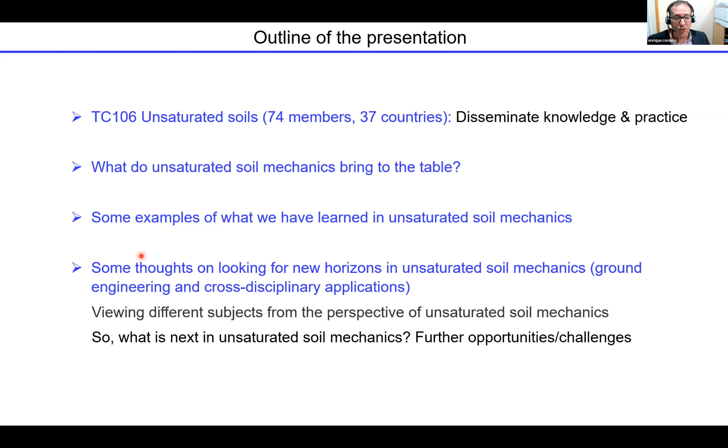So as an overview, one of the first objectives dealing with the dissemination of knowledge and practice encourages us to prepare keynote and honor lectures, state-of-the-art reports and lectures, and also organize regional conferences and main conferences regarding our TC. And in this regard, next month we are having, on Milos Island in Greece, our main conference 2023. It is the 8th international conference, with the aim to provide researchers and practitioners this opportunity of sharing up-to-date knowledge.

So there are some topics of the thematic lectures which are usually more linked to more traditional unsaturated soil mechanics, and also covering new aspects of unsaturated soil mechanics. And we will have lectures on shrink, swell, and collapse behavior, how the microstructure of the soils interacts, the THM, the thermo-hydromechanical behavior of soils in a multi-physics coupled process. Also thermal cycles, how they impact unsaturated soil behavior. Also seismic compression in unsaturated soils, new challenges in experimental unsaturated soil mechanics, and new aspects on root-soil physical interaction, which are new applications on this type of bio-inspired issues in which unsaturated soils play a major role.

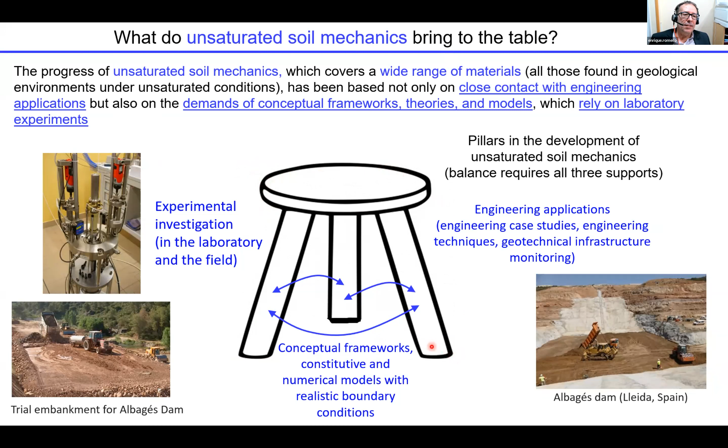So now let's start presenting some issues. I will start with more conventional issues. Then the presentation of Maha will go further with different applications. I am explaining a case which occurred some time ago on compacted earth fills used in the abutments of a highway bridge, where the material was compacted in an arid climate. So it was compacted dry of optimum. These are the mean field values compared to the optimum, and as you can see, we target a very nice dry density, but with a deficit of water.

What happens after heavy rainfalls occurring just after the summer period in which most of them were constructed? We had a lot of problems with collapse. This is an 8 to 10 meter earth fill, and this is an important collapse. You can see it by the shade. About 1 meter? Yes, half a meter or something like this. So it was impressive, and it occurred in most of the fills compacted in these highway bridge abutments.

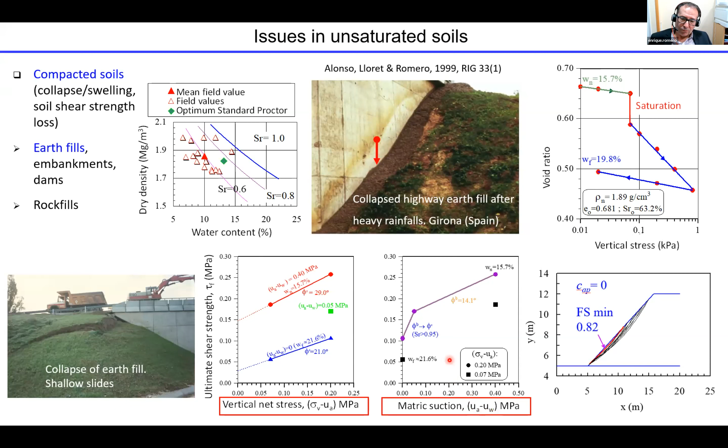Here we are having a natural soil, and we are undergoing an unloading because we want to do an excavation on a saturated, let's say, clay stone, quite stable. And during the excavation, we induce the unloading process, which occurs usually very fast. We induce some pore pressure decrease, and probably in some points we are generating suction.

Suction generated under nearly or close to saturated conditions. We can have suction even under saturated conditions, and this is something we have to have in mind, because usually suction is much related to the concept of partial saturation, and this is not exactly the case we are facing in this example. The material is still saturated, but it has a deficit in the pore water pressure, inducing the matric suction.

It's similar to what happens when we are retrieving samples at a certain depth, and the total stress relief induces a pore pressure decrease, invading the negative regime, or having matric suction, okay?

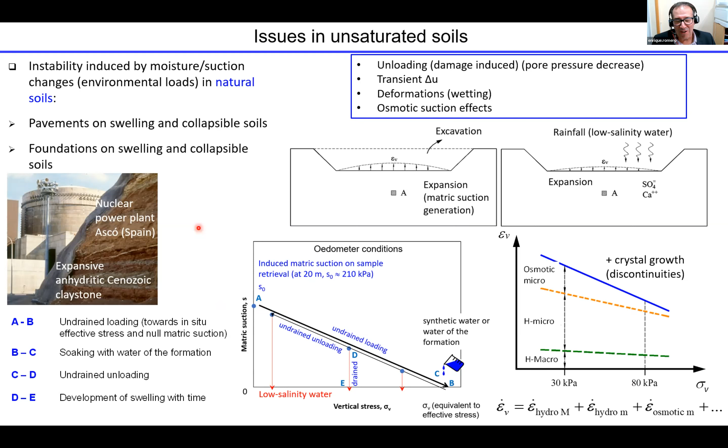This is so informative. Yes.

Manipulating water pressures in a negative regime is not so easy, so we need special techniques to regulate and control the negative range of pore pressure, converting this range below atmospheric pressure into a positive range. This is usually done by the axis translation technique, making the liquid pore pressure positive and allowing its manipulation.

So we are increasing the air pressure, an artificial increase. It's like moving the soil to another planet where the atmosphere is heavier. Then we have a difference between the pore pressure, the liquid pore pressure, and the gas pressure, which deals with suction.

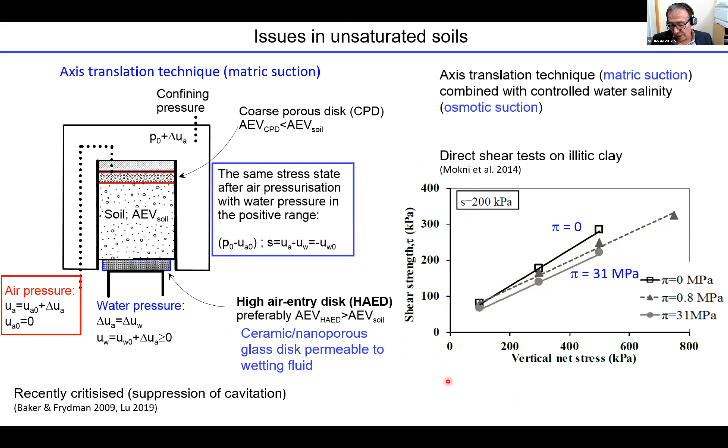By controlling the suction, we can also apply different levels of osmotic suction. We can have more salinity or more dilute conditions, which affects the shear strength properties in this case. So this is the way we usually address these issues.

Now let's go into this very complicated slide, but we will go step by step. The first thing to address is the graph showing mean particle size, ranging from very small, silty, clayey materials, to more sandy materials, to larger coarse granular aggregates.

Here we are having the volumetric strain, shown in a log scale just to represent the data. The data represents the collapse occurring when we start from very dry conditions to saturated conditions. Depending on the size, different phenomena may arise, and this is very important for the theory to explain different issues.

For example, in a silty clay soil, water is usually stored inside and outside aggregates, but the aggregates are porous elements capable of storing water. During water soaking, the aggregates expand and lose stiffness. Under a certain load, they accommodate and fuse together, reducing these large pores, and this is how collapse occurs in silty clay soils.

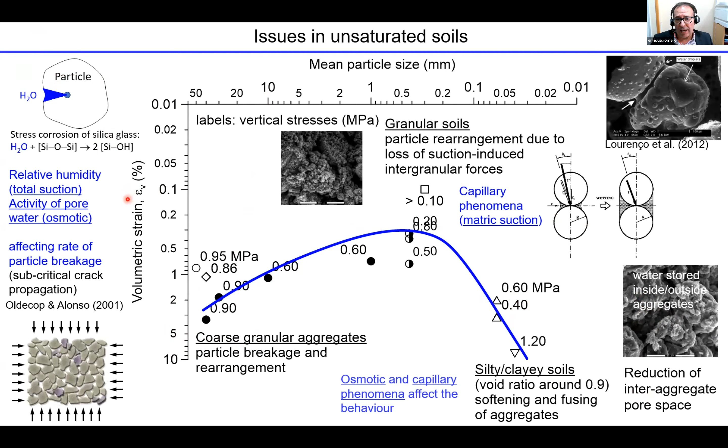So what do these field cases have in common, and what does unsaturated soil mechanics bring to the table? Basically, we have matric suction, dealing with the curvature of the meniscus, where we have an air pressure in excess over the liquid pressure, and this is why we have this meniscus, usually in between grains.

But don't forget about the osmotic component, which also plays an important role. When dealing with chemical issues, the concentration needs to be activated as a pressure-controlled variable, and this is not easy. So we use thermodynamics to convert the concentrations or activity into a pressure—this is the osmotic pressure, which is important to have the gradients and the total head for the gradients controlling flow to occur.

Flow occurs due to total suction gradients involving osmotic, matric, and other more complex components. The mechanical behavior is driven by changes in matric suction, affecting interparticle forces, particle breakage, and the shrinkage or swelling of clay aggregates.

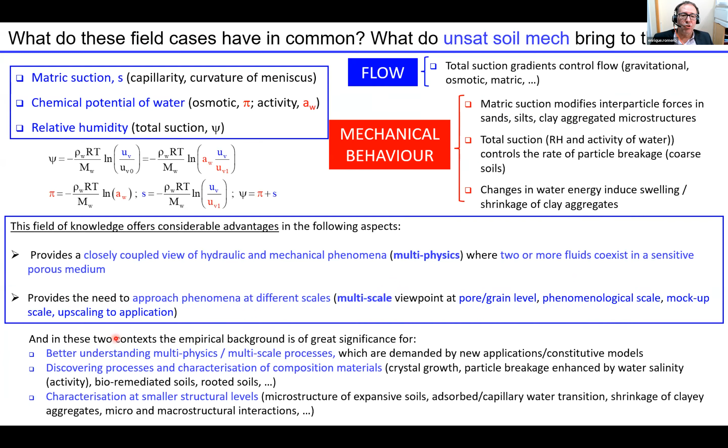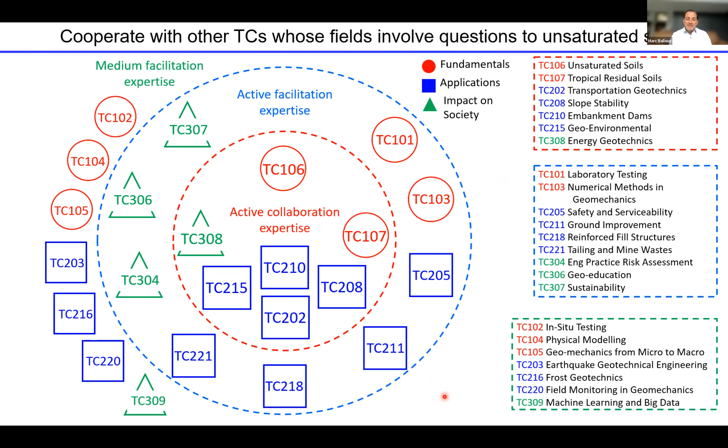You know, water is our number one enemy. Yes, water is an enemy, particularly if the water is contaminated. And also all the water is heated - this is another problem, with energy geotechnics. The only TC that likes water to come through is the geothermal, geoenergy one. Yes, but it also has important issues to face in the multiphysics, because temperature changes and processes dealing with heat exchange change properties.

Looking a little into new horizons dealing with unsaturated soil mechanics, I think we should always target the future in order to revitalize the relevance and impact of unsaturated soil mechanics, and also shift to other cross-disciplinary research applications, and have more collaborations with the technical committees previously indicated. These are a list of possible future applications in which we are involved.

We are there in ground engineering because we are very close to climate stresses and soil-atmosphere interactions. We are very close to rock weathering, shrinkage and cracking, fissuring. We are close to chemical issues with crystal growth and salt accumulation, which is a critical issue in arid climate soils, where the solvent water evaporates but the salt is always there, increasing and growing, and probably affecting the expansion capabilities of the systems.

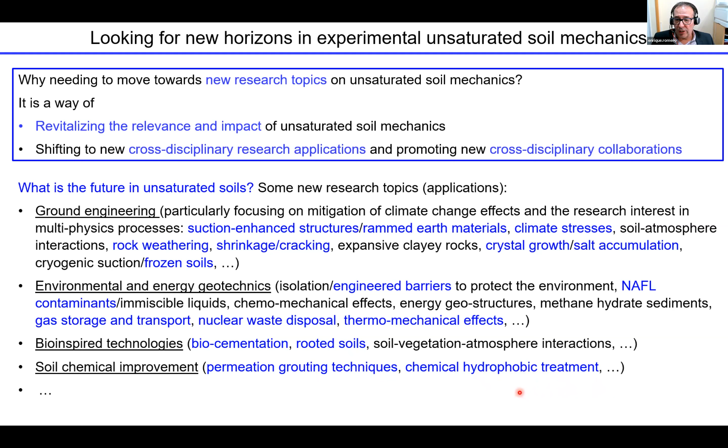Also in bioinspired technologies, because we have partially saturated soils in rooted soils, and also biocementation phenomena, because we need the possibility of gases to come through, or to have partially saturated conditions in rooted soil. And also in other fields like permeation grouting techniques under partial saturation, or hydrophobic treatments, which can be used to avoid the impact of water damaging certain materials.

And this is a look of how we usually try to look at the phenomena. This is in the case of bioinspired technologies, rooted soils. Here we have not only the sensitive porous medium, but also sensitive roots, which are also shrinking and swelling, decaying and living, okay? So they interact with the soil, affecting slope stability and soil-vegetation-atmosphere interactions. And we need to look at these systems in which roots affect soil and soil affects roots in all these phenomena indicated in this part of the slide.

But we need to face all this knowledge by looking at the phenomena at different scales, and this will help us upscale the problems to approach, let's say, real applications. Okay, so here we are facing microstructural issues, how fissures are created besides pores when roots grow inside the porous media. We are not only clogging pores, but also having new interfaces between the soil matrix and the roots. This affects the transport properties of the soil and the water retention curves, which can be observed in a phenomenological

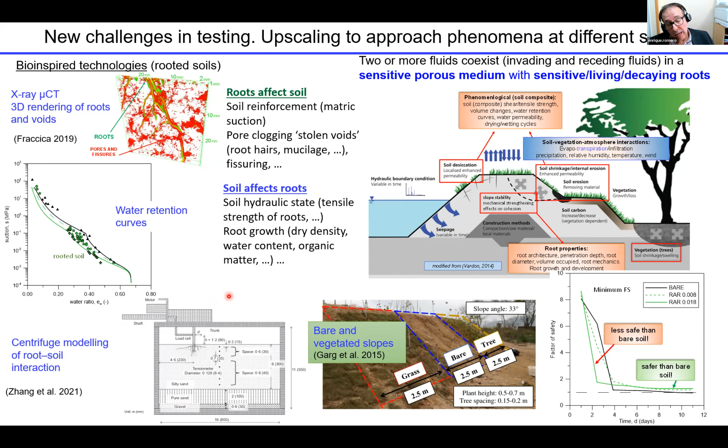So this is why we are only... You should add agriculture engineering to your slides. Yes, yes, this is the reality. This is the reality. Yeah.

And this is another case, a little bit on another topic, in which we have exactly the same upscaling phenomena. Basically, the intention here is to have an engineered gas permeable seal. So we need a seal. This is for isolation barriers to protect the environment, usually for low and mid-high radioactive waste disposal.

And here there are two ways of getting rid of the gas, which is produced by the corrosion of the metallic canister. Usually by allowing it to slowly diffuse through the pore water. But this is sometimes dangerous because we can generate high gas pressures, and this is not good because we can open fissures to the biosphere and contaminate the biosphere.

The other way is letting the gas pass through more permeable seals, which have low water permeability and high retention capacity, but they are gas permeable, okay? This is usually done with sand bentonite mixtures. And we looked into the effective gas permeability transport properties at different scales.

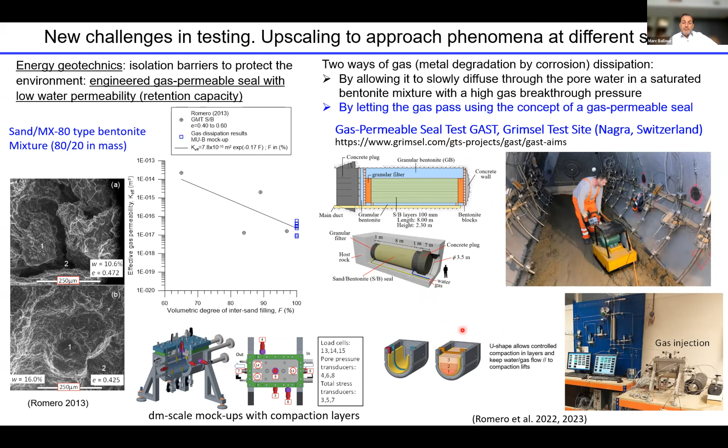Enrique, we're running out of time. Yes, maybe... yes. I think this is the last. This is my last, and I will close my presentation.

So these are a list of future challenges that I am thinking of as TC activities. We need further achievements in academic concepts, looking at these multidisciplinary and multi-scale problems. But also we have to improve laboratory techniques to improve the efficiency and representativeness required in modern engineering practice. This is more with more conventional types of practice.

Also, we need to progressively incorporate these techniques in design criteria and codes of practice, which is something still missing, because partial saturation is very far from a lot of codes. And also we need to share information. This is particularly important when we are talking with the industry, with the practitioners, to reduce the gap from fundamental experimental research, so that we are a fundamental TC to apply research and progressively bring unsaturated soil mechanics into practice. And of course, important. Yes, I agree. This is why I underline these things, because I think this is very, very important.

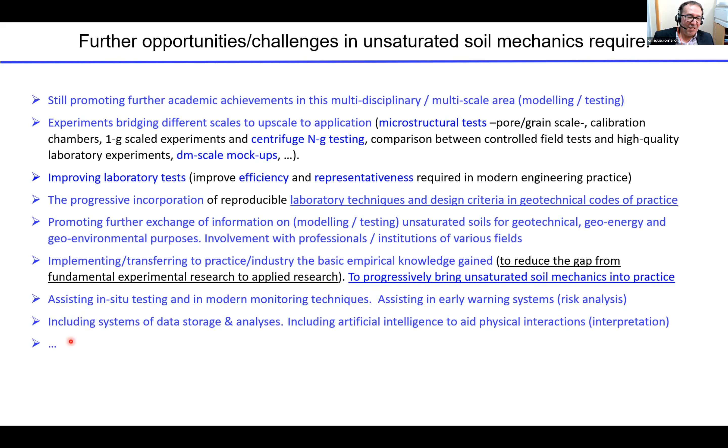And of course there are other things, like assisting in situ testing and modern monitoring techniques. I had the opportunity some time ago to go to the Grimsel test site of Nagra, Switzerland, where some of the tests dealing with radioactive waste disposal are carried out. This is a high temperature test. It's called HotBENT. You can look at this information here. And it has 1,300 sensors.

You can imagine. I took the opportunity. These are my pictures. These are cables for the sensors. This is impressive. And all this is coming to computers to look at all this information. This is why I also place assisting in situ testing and modern monitoring techniques, how we face all this important data. Okay, thanks for your attention.

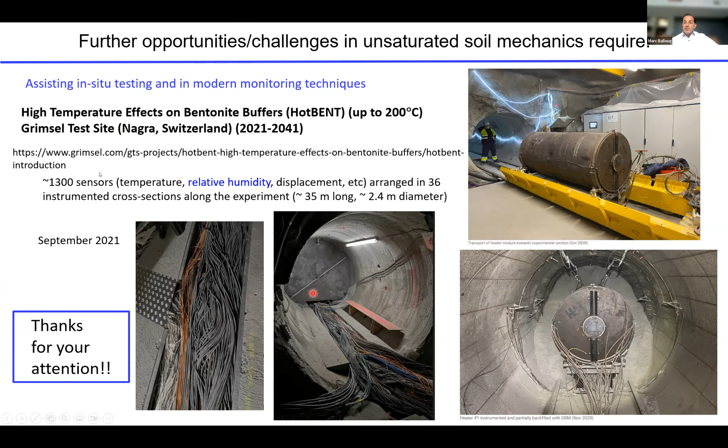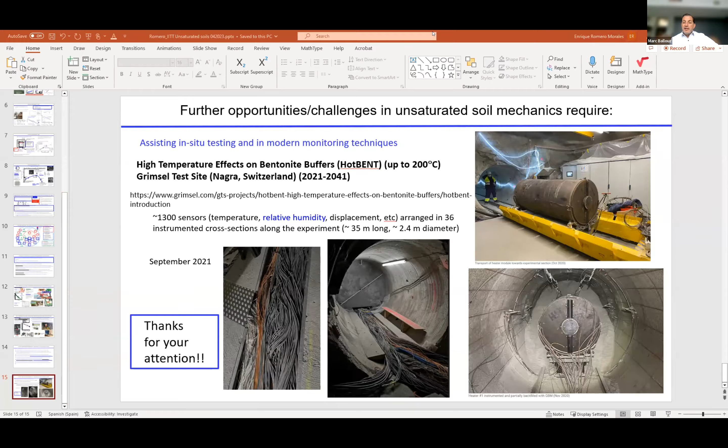That's all. Thank you so much. If you stop sharing, it will be my turn. Yes, I stop sharing. There's so much to learn in this field. It's Easter and it's God's day, and you see how small we are compared to what He created. We are still very small. Yeah. Now you can share your screen. You're still muted. So hopefully by now you can see my screen. Yes, I like how you modified the logo. Yes.

Okay. Thank you, Professor Enrique. It was a very interesting presentation.

And it shows us how complex unsaturated soil mechanics can be. Hopefully, with what I will be presenting today, I would try to encourage you to use unsaturated soil mechanics for routine geotechnical applications.

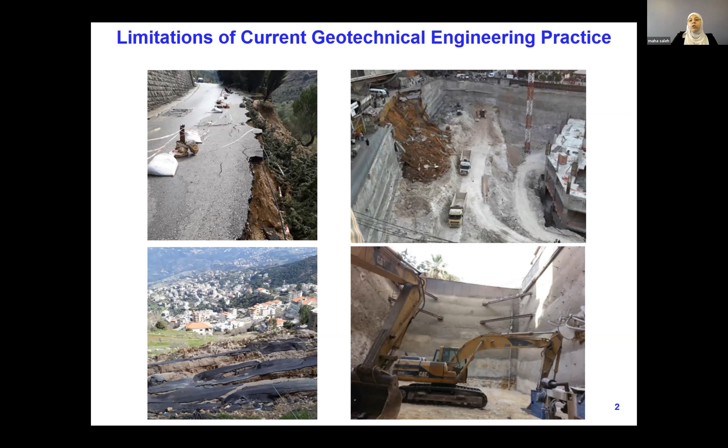These limitations are reflected in failures that continue to be encountered in natural slopes, overestimation of wall deformations in the design of shoring systems, the relatively high bearing capacities that we measure in the field as compared to what we calculate using the conventional methods, and the list goes on. The big question here comes to mind. Why do failures happen? And why do we continue to observe discrepancies between predicted and observed performance of structures?

While there are many reasons that can be attributed to these observances, one which is most important to me is ignoring matric suction and its contribution to the soil strength in our design approaches. All conventional design approaches now assume that the soil is in a saturated condition, but in fact, it isn't.

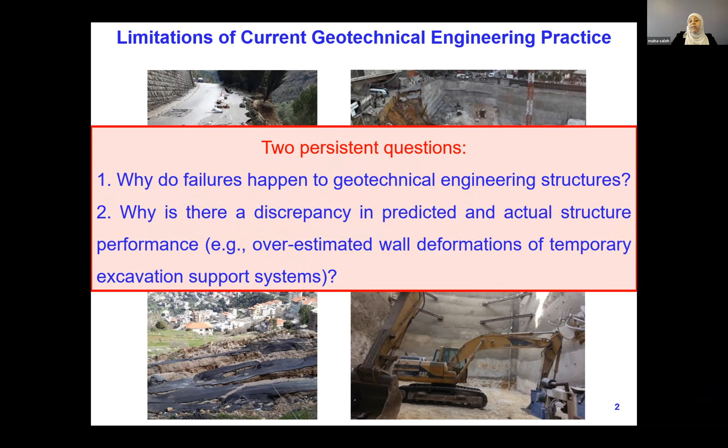Geotechnical infrastructures such as footings, shallow foundations, piles, pavements, and retaining walls are typically located above the natural groundwater table, where the soil is in a state of unsaturated conditions. This is particularly true in semi-arid regions and arid regions that constitute approximately 40% of the world, where it is likely that these infrastructures would never attain fully saturated conditions in their design life.

So let's take a look at the pore water pressure profile under these structures in these regions. We can see that multiple suction profiles can occur in the unsaturated zone above the water table under different climatic conditions as well as different environmental conditions, such as some of the examples that Professor Enrique provided and how vegetation can affect suction.

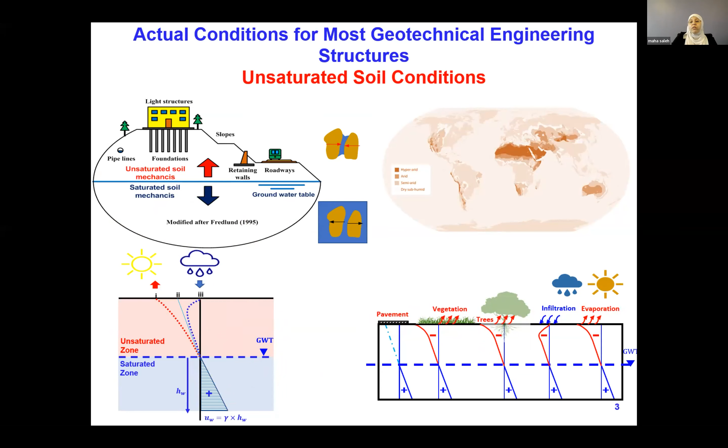This means that the performance of the soil in the unsaturated zone is not constant, but it varies temporally with suction. This variation in suction needs to be considered in the design because we know that there is a great difference between the behavior of saturated and unsaturated soils. And this differentiation needs to be confirmed and taken into account by practitioners.

But why is unsaturated soil mechanics still rejected by the practicing community? Mainly because engineers are not trained to handle unsaturated soil conditions, specifically during their undergraduate years. In addition, there's a hesitance in relying on suction, which is variable over time as we've established here. Also there are complexities in measurement of the soil property functions of unsaturated soils because it involves a lot of complicated and cumbersome laboratory tests.

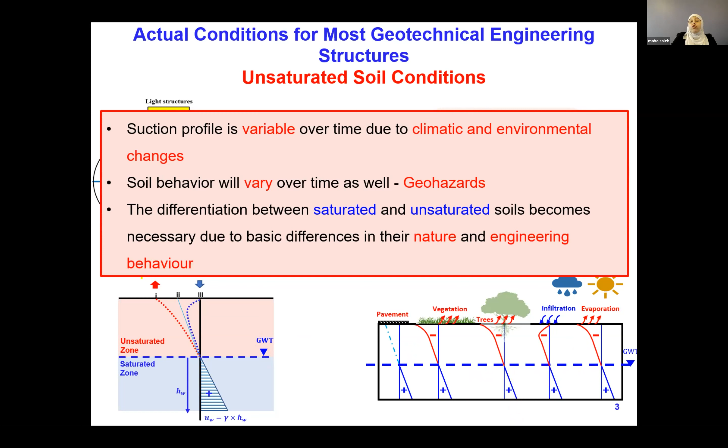But is there a way around these challenges and concerns? And what do recent research trends offer us here? Let's have a look at some field suction profiles monitored under various climatic conditions and environmental scenarios, which show that the soil doesn't necessarily reach saturation, or suction is not necessarily lost. This suggests that with proper understanding of the local climatic and environmental conditions, along with some tools for seepage analysis, a reliable suction profile can be considered in the design of geotechnical engineering structures in unsaturated soils.

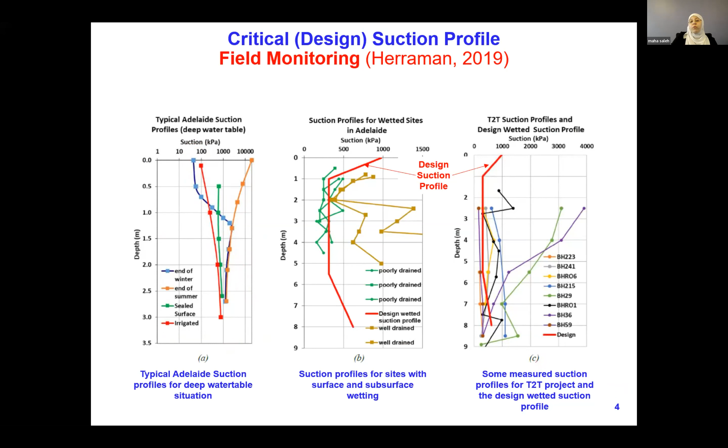Moving forward to unsaturated soil properties and how we can better estimate them. Experimental studies in the lab have shown that there is a similarity between the soil-water characteristic curve and the soil property functions of unsaturated soils. This observation has led to the emergence of simple estimation tools for predicting unsaturated soil property functions using the soil-water characteristic curve. Such simple techniques are valuable in geotechnical engineering practice.

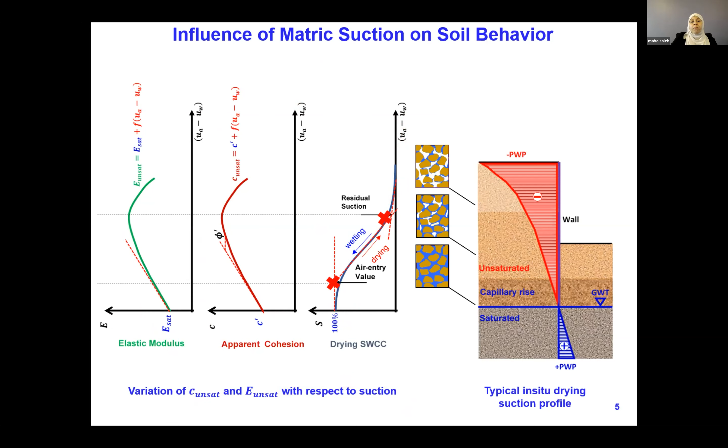For example, to overcome the complexities involved in measuring the suction contribution towards shear strength in the lab, the above models have been developed and validated, and they show reasonable agreement between the measured values in the lab and the predicted shear strength using the soil-water characteristic curve. So the use of these models, developed by Vanapalli in 1996, as well as Oh and Vanapalli for modulus of elasticity, only requires the soil-water characteristic curve in addition to a few basic physical properties of the soil, such as plasticity index and grain size.

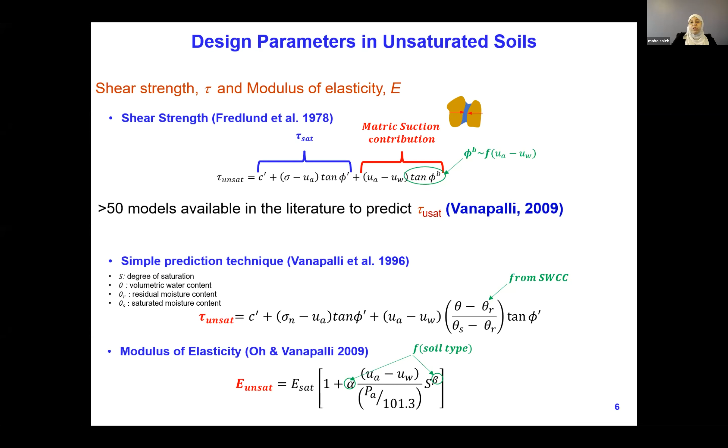The development of such models in the literature has resulted in the emergence of a framework for extending unsaturated soil mechanics to routine geotechnical engineering problems. We're going to go over this framework in this slide. The framework mainly consists of 5 basic steps.

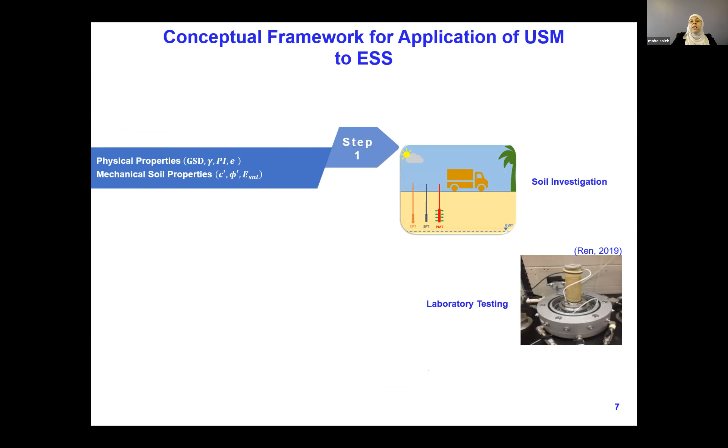The first step would be measuring the basic soil properties, similar to what we do in conventional soil mechanics, either from soil investigation or from laboratory testing. Once we have the basic soil properties, we can measure the soil-water characteristic curve in the lab or use many of the prediction models available in the literature to predict the soil-water characteristic curve using the basic physical properties.

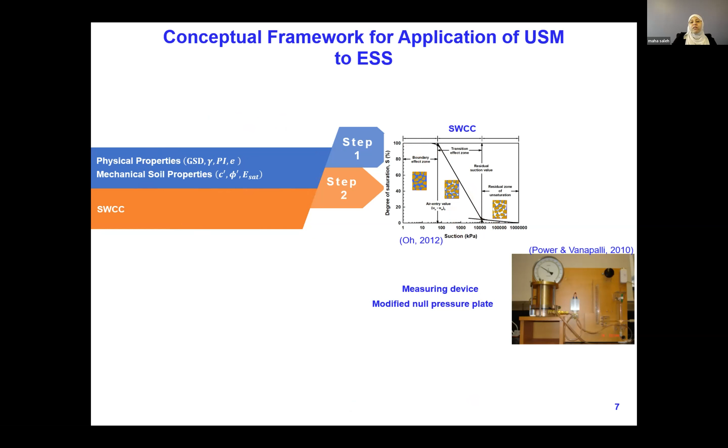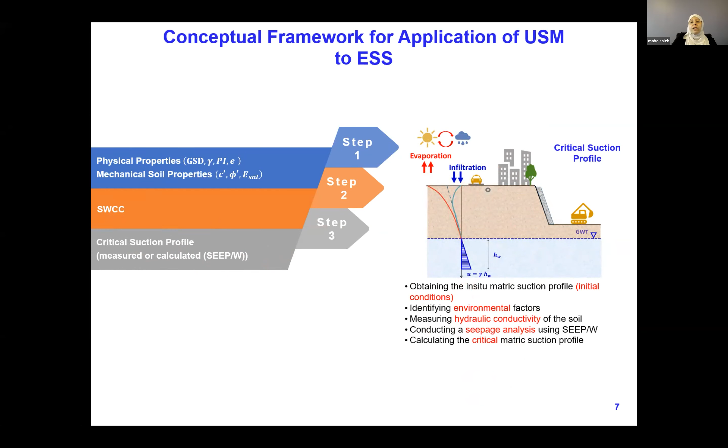Then, the critical suction profile can be determined either from historical local climatic records or by running a seepage analysis, which takes into account climatic conditions, environmental conditions, as well as the hydraulic conductivity of the soil. Now that we've obtained a critical suction profile, we can determine the unsaturated soil property functions, namely the shear strength and the modulus of elasticity of soil, from the soil-water characteristic curve corresponding to the critical suction profile that we've estimated in step 3.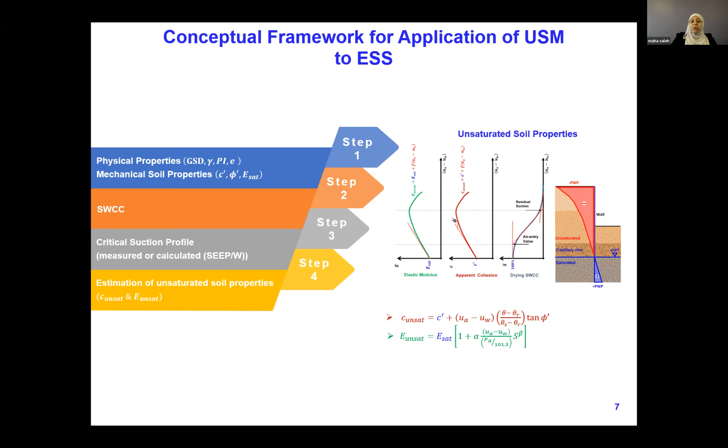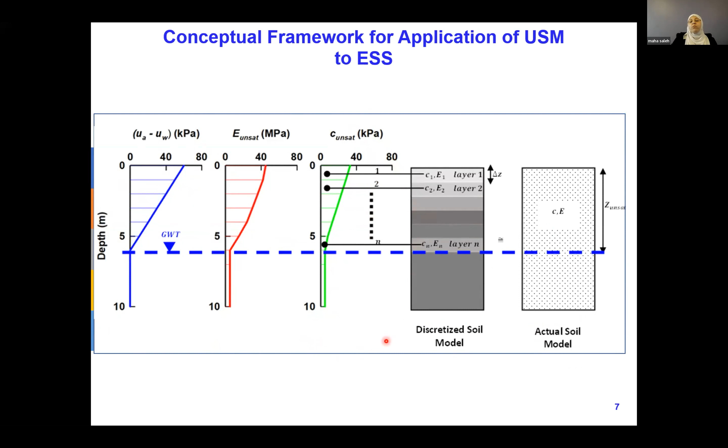And finally, step 5 involves obtaining a discretized soil model with these soil properties based on the critical suction profiles that we've estimated. Once we have these soil properties, we can proceed with analyzing the geotechnical problem at hand.

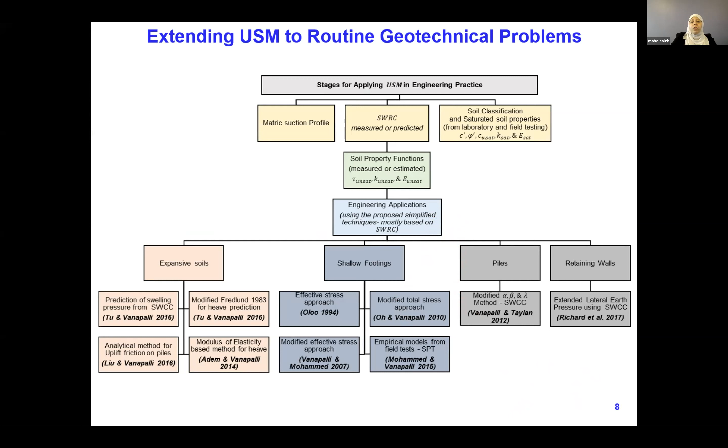Here, research at the University of Ottawa, led by Professor Vanapalli's group, has been focused on expanding unsaturated soil mechanics to routine problems with the use of simplified procedures relying on the soil-water characteristic curve. Other researchers also contributed to this field as well. We're not going to go through all the procedures. We're going to focus just on bearing capacity and pile capacity, just to demonstrate some of these models.

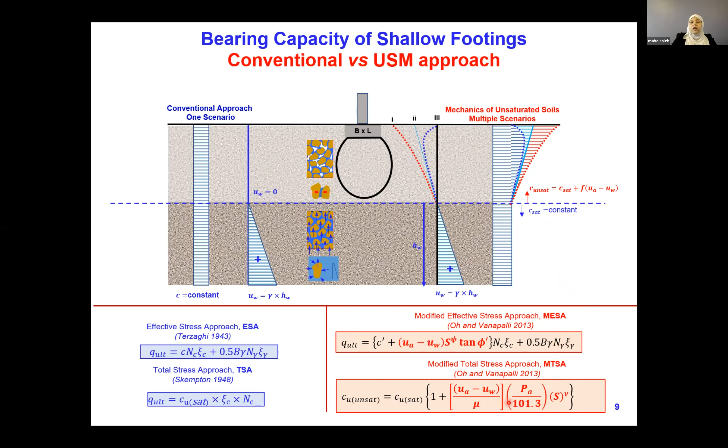So the unsaturated soil mechanics approach, unlike conventional methods, is associated with multiple suction scenarios, which would lead to multiple apparent cohesions and multiple moduli of deformation. Available simplified procedures to estimate the bearing capacity considering suction have been provided by Oh and Vanapalli, 2013, for both drained and undrained conditions. These procedures were validated experimentally on various case histories, as well as model footings tested in the Ottawa University laboratory, where the estimated bearing capacity was observed to match the measured bearing capacity.

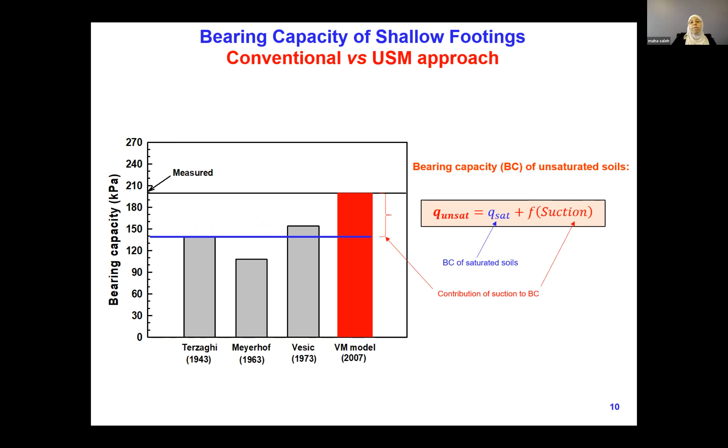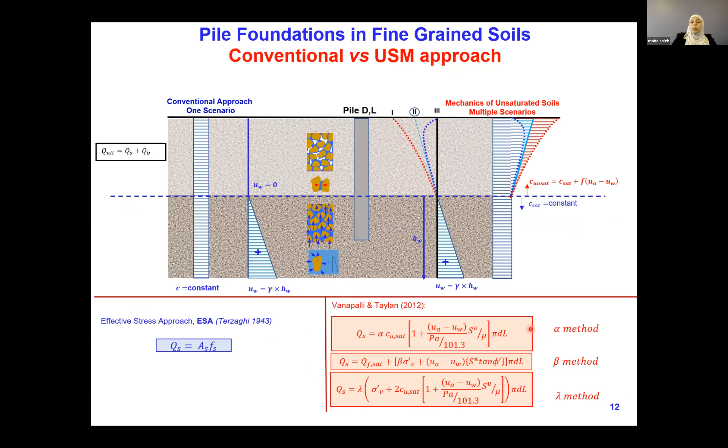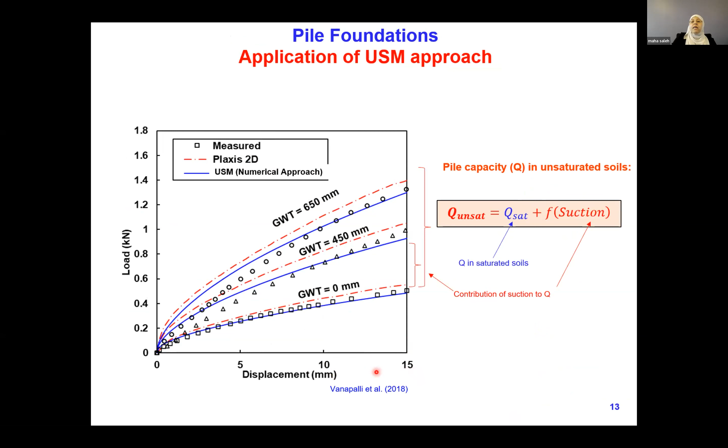Similarly, extended procedures for pile tip resistance, as well as skin friction resistance for piles, were developed using the soil-water characteristic curve as a tool. Experimental validation on model piles showed good agreement between estimated and measured pile capacities considering suction.

Another very typical application of geotechnical engineering would be excavation support systems. The focus now at the University of Ottawa has been given to excavation support systems, an area that has received little to no attention within unsaturated soil mechanics. The influence of matric suction on the lateral earth pressure was included using the soil-water characteristic curve as a tool as well, extending the Rankine active and passive earth pressure equations.

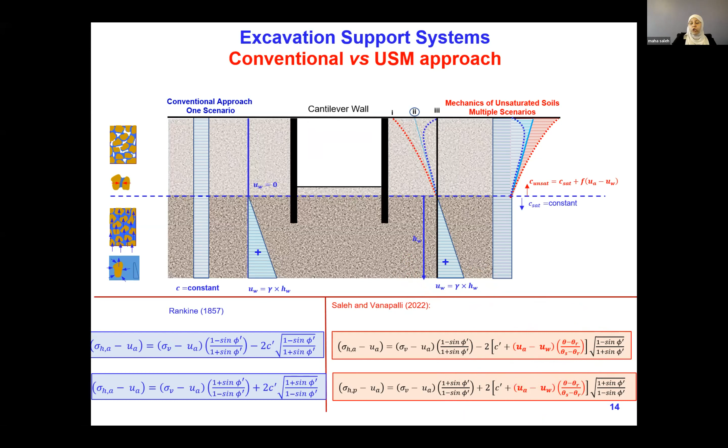In order to demonstrate this and the framework that we've discussed earlier, a finite element numerical model was used to model a cantilever diaphragm wall, considering saturated and various unsaturated conditions to investigate the performance of excavation support systems in unsaturated soils.

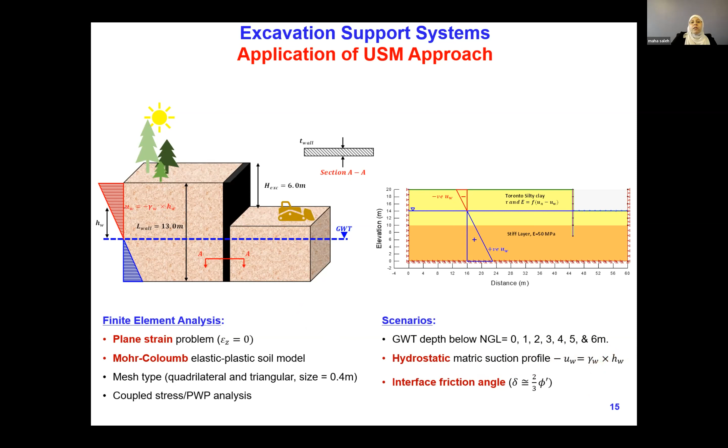Sorry to interrupt. May I know what kind of software you are using to obtain these results? Yeah, so the software that we used here is SIGMA/W. It's a commercial finite element software specialized in geotechnical applications. Okay, thank you. SIGMA/W. Yeah, it's GeoStudio, SIGMA/W, correct. The results from the previous slide? Yes, and this as well, but these were developed using the plots separately.

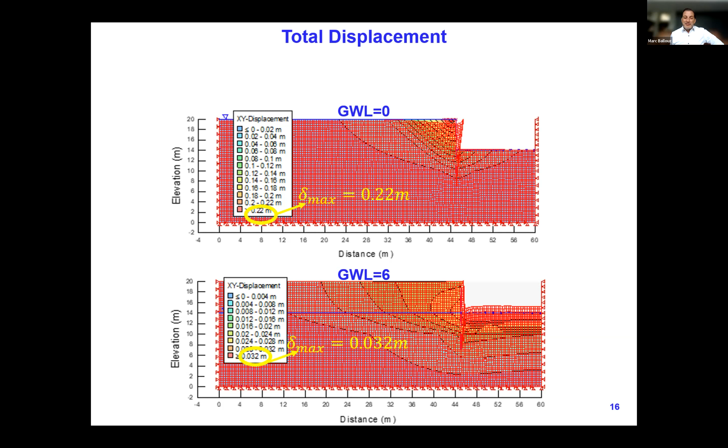Okay, I can't wait, I'm counting on you, Maha, to change the world. Well, thank you very much, Professor. Oh, your beautiful presentation, keep going. You have to go a bit faster. I'm sorry, but we're running out of time.

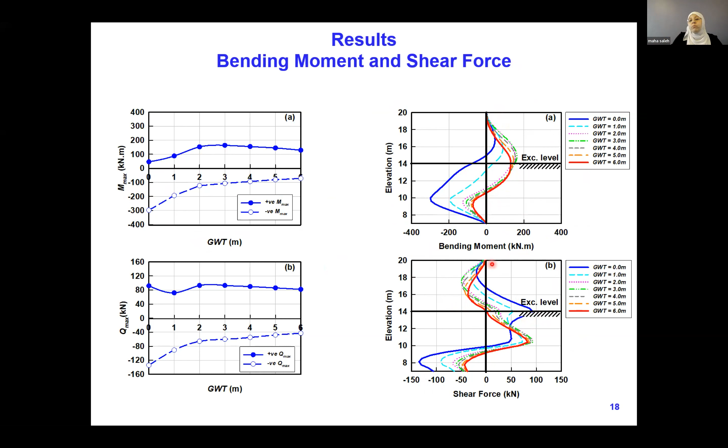Yeah, I'm almost done. So as we said, results for wall deformation, these are typical parameters that we monitor when designing excavation support systems. Similar trends were also observed for the bending moment and shear force diagram. Red is for the most unsaturated case and blue is for the most saturated case. Perhaps here it's very important to show how the maximum and positive bending moment can be unpredictable. It's not just a matter of higher or lower, it's also a matter of how the bending moment becomes distributed along the pile. This is important for engineers who use different steel sections across the pile when designing an excavation support system.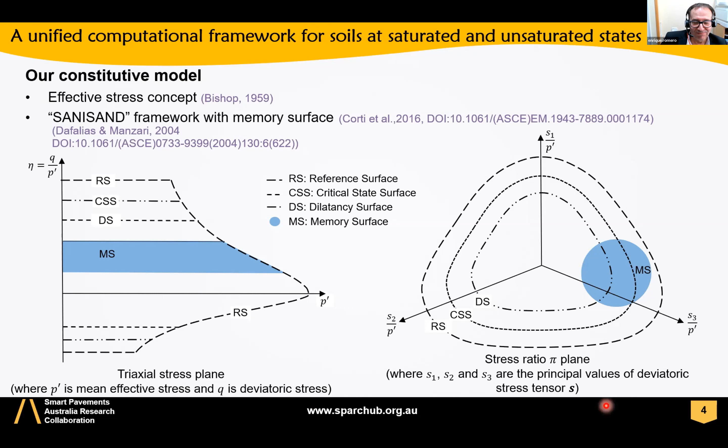So now I'm going to continue. This test proposed by the SPARC Hub is a suitable laboratory test that provides valuable insights into the behavior of soil and pavement structures. It's performed using...

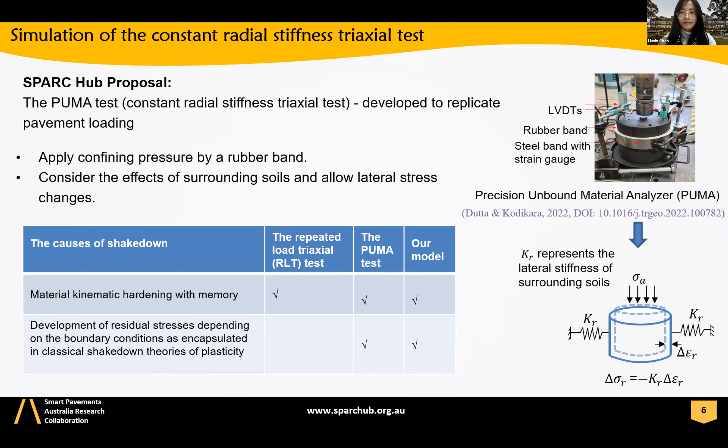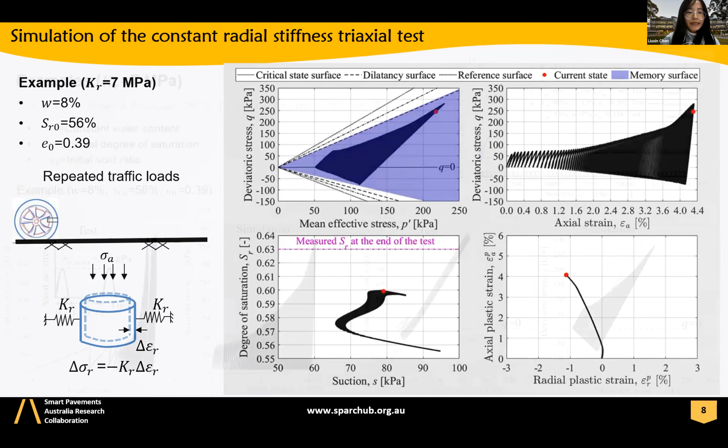So you are handling both bounding curves, the wetting and the drying. Yes. And what happens if you change the degree of saturation, or the water content, by wetting? Are there any results on these aspects during these cyclic repeated traffic loads? So in these slides, we simulated many examples with different initial conditions. But imagine that you are changing the degree of saturation by wetting. Have you run this type of test? During testing, you mean? During testing, yeah. Like it rains?

Oh, okay. Yeah, so for the initial condition, we consider it's wetted to this state, and then we start the test. Yes, but imagine that you are doing the cycling, and at a certain stage you receive some rainfall. What happens? The degree of saturation increases, but this hydraulic process also affects your hydromechanical constitutive model, which is coupled through the constitutive effective stress.

Have you done this type of test, or are you thinking of doing it? Just to know. I think just by changing the initial conditions from the curve, she's covering that. But this may vary a little bit. Explain to me. So Enrique, what you're saying is during the test to inject some moisture and see what happens? Yes, because at this moment we are injecting some moisture, and we are doing this test under constant moisture content. So the stage is first injecting water, then doing the cyclic test.

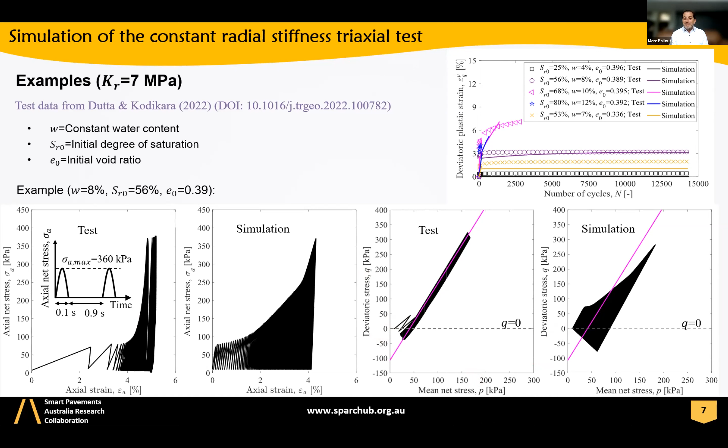Okay. No, I'm running out of time, Liuxin. Sorry to interrupt you. Let's wrap it up. Okay, sure. Thank you.